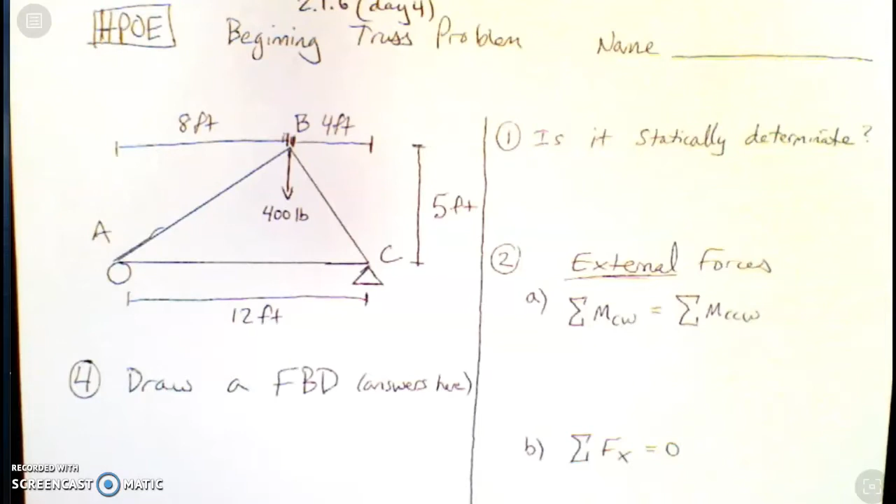Even though it's an easier picture, imagine a 400-pound weight hanging on this part of a bridge. The most simple bridge you can have is just a triangle. So I know you can do this, and this is the whole wrench thing that you got to get good at. Just know when I write this, it's the same as writing the forces right equal the forces left. You can change them over. I kind of prefer this way.

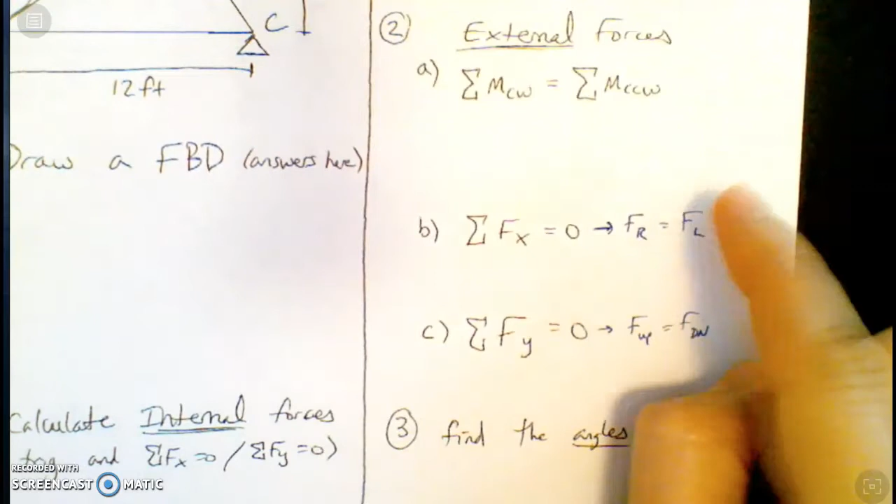It's just saying the sum of all x forces is 0, which means they cancel out. Same with this one. When you see the force of the y's is 0 total, it's just saying the force up equals the force down. And then you make that work. So this is old stuff. Finding the angles, remember, it's the inverse tangent of y over x. Okay, so you're going to do that for angle A, and you're going to do it for angle C. Remember, you don't need angle B. You never need that top angle. You only need any angles on the bottom.

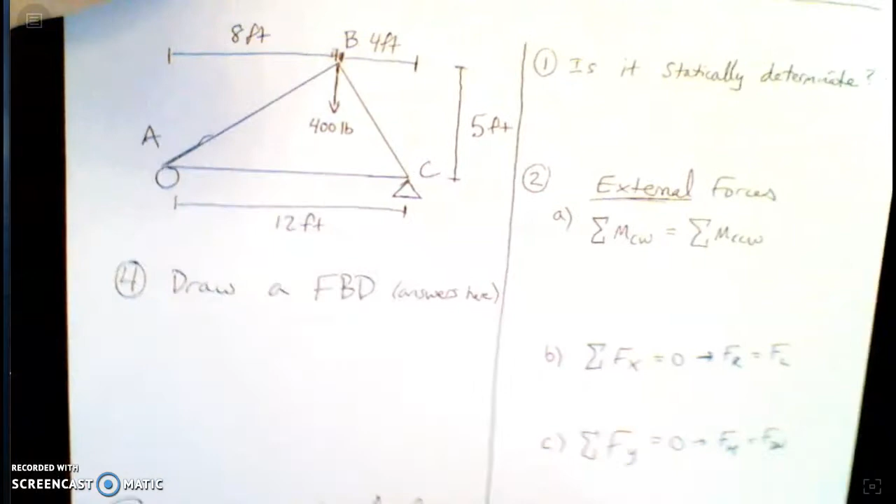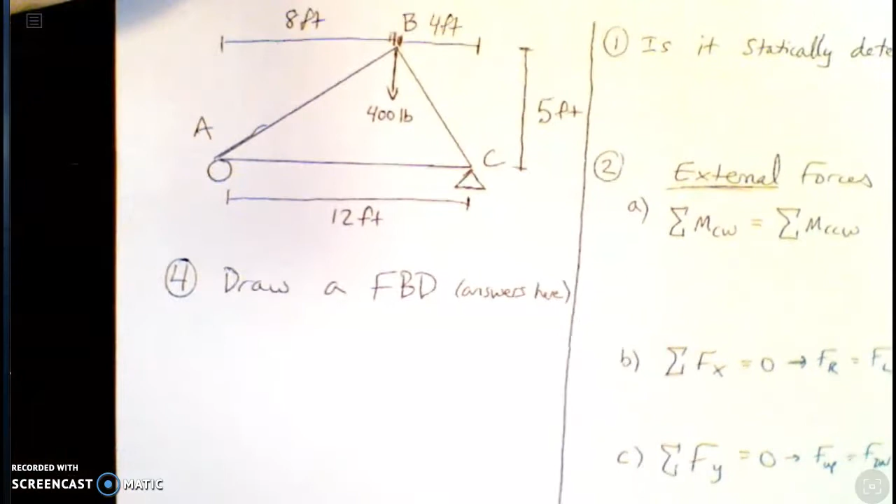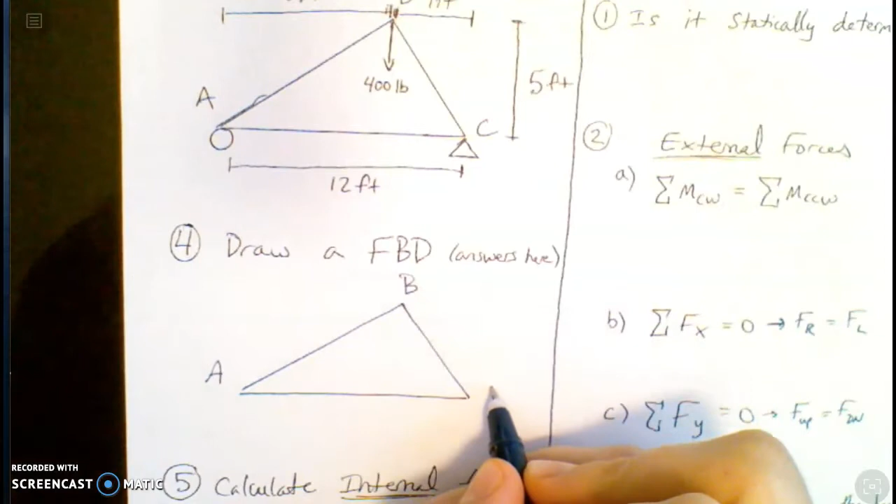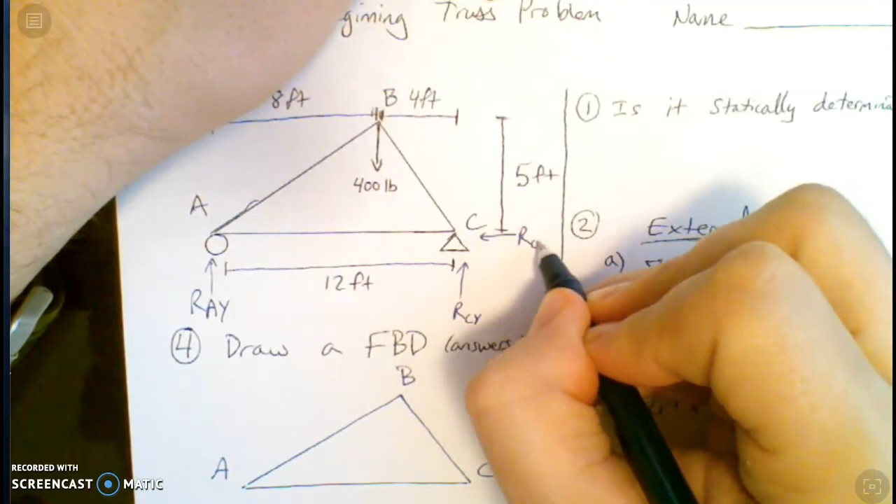So that was step 3. Step 4 is the free body diagram, and this is where all your answers will be. I am going to help set that up. So remember, with a pencil, or like me, an erasable pen, you want to redraw your original picture with joint A, joint B, and joint C. Okay, and instead of drawing the roller, which has RAY, and joint C has an up force, which is RCY, and it has an in force, which will probably be 0 because I don't see any horizontal forces.

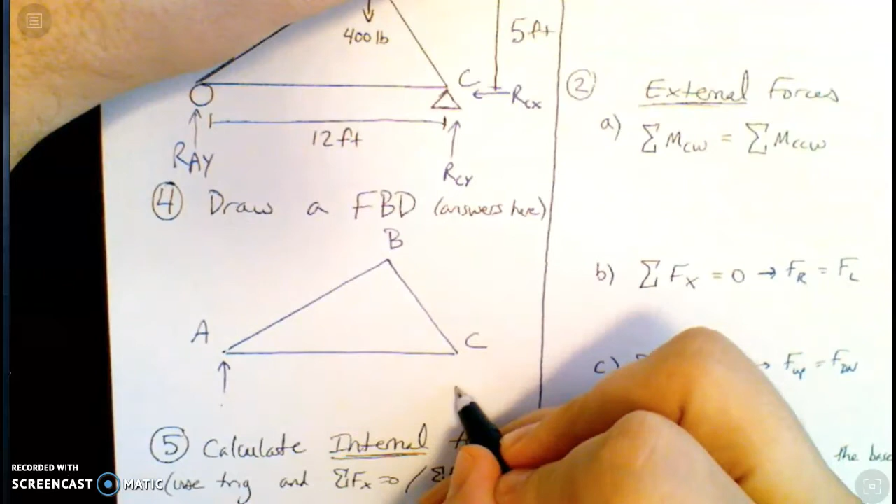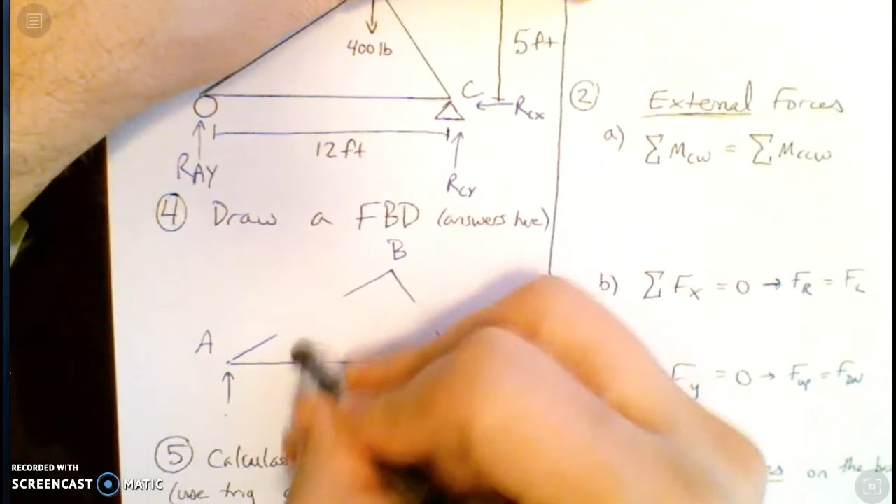So you basically just want to draw all the things you know, and you're gonna know those 3 answers once you're done with it. So I got this up force here that I'll know a number for. I got an up force here, and not to spoil the surprise, if this is 0, which it will be, you don't have to draw that on there. And then this is how you do free body diagrams. Since we've only had one example of that, you basically draw the whole triangle and just erase the middles so you can focus on each joint by itself. So there's joint A, there's joint B, and there's joint C.

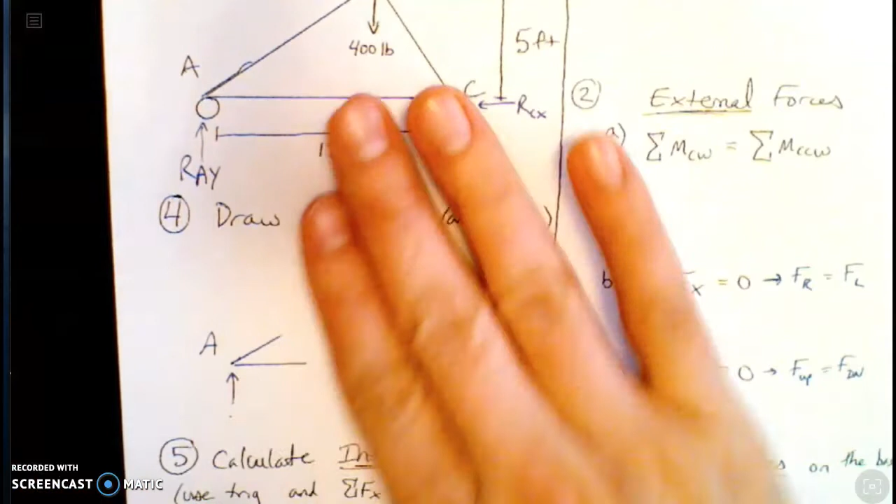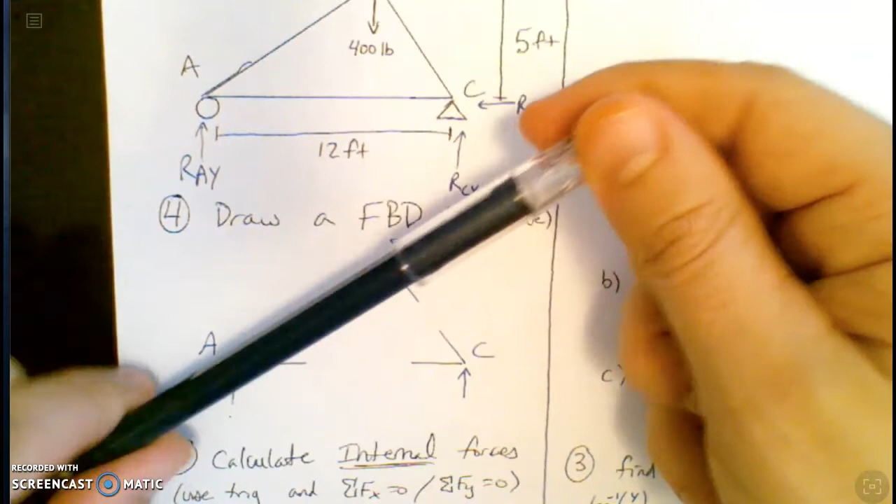So if I looked at joint A, here's how you know what forces are actually on these beams. If there's an outside force pushing up, remember I'm blocking these out, the only thing that can battle that force is a down force, and this guy can't create a down force, so it must be this diagonal pushing down that way. And every force, Newton's law, has an equal and opposite reaction. So if AB beam is pulling down this way, the only thing stopping it from moving is there must be an opposite force going that way.

Okay, now we're still focused on A. Now I have a diagonal down and left. The down part fights this up, but now it's pushing left. So the only thing that can combat that is if this horizontal piece battles and fights to the right. And now you got the whole Newton's law. Every force has an equal and opposite reaction force. So this pushing in, it's in compression, so there must be a force pushing back.

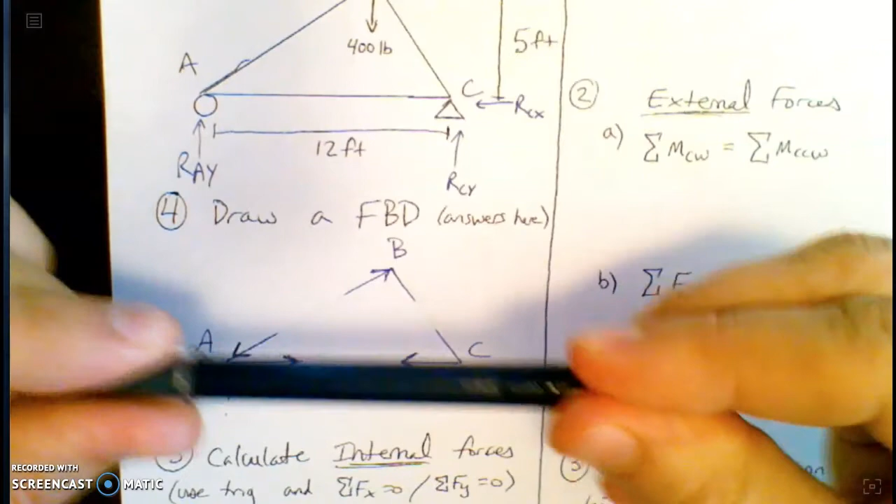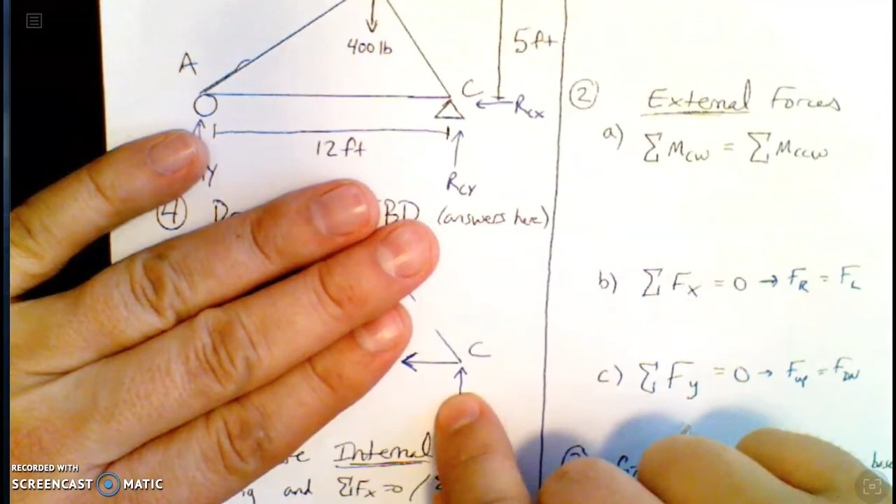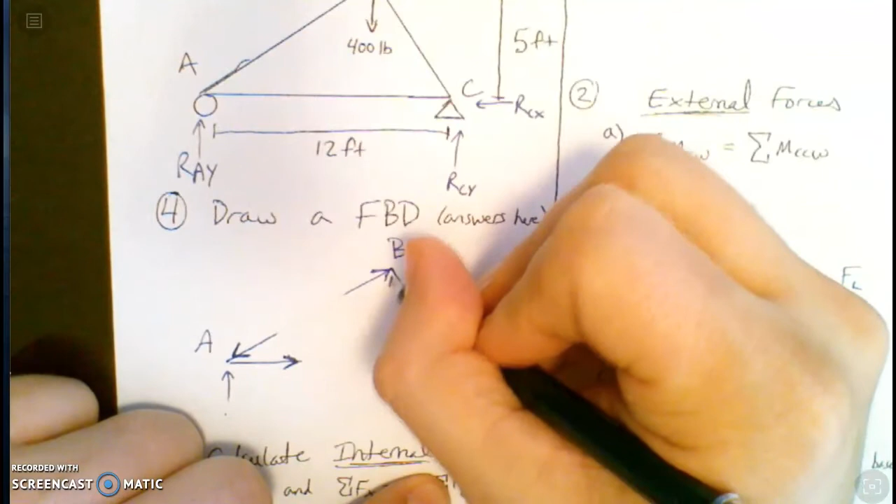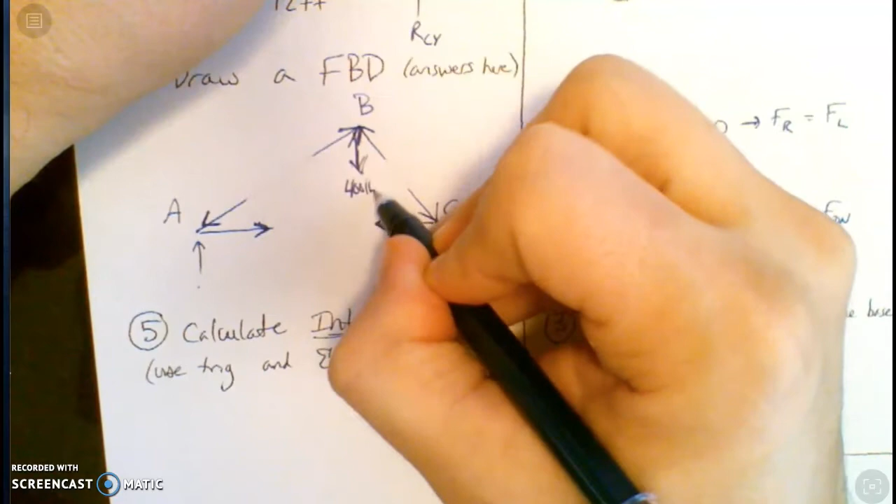And I got my last one. You can do it a variety of ways. You could do this again, just like joint A. If there's an up, there must be a down somewhere. Or you could say up here, I have an up, so there must be a down somewhere. Anyway, we'll get that going. So here, that's got to be a down. Oh wait, this is an up. Oh, I forgot. That's why. There's a 400-pound force I didn't even draw. I'm like, how can they both be going up? Well, that's because there's a 400-pound force going down. So those two ups will battle the one down. And you got some going right, some going left.

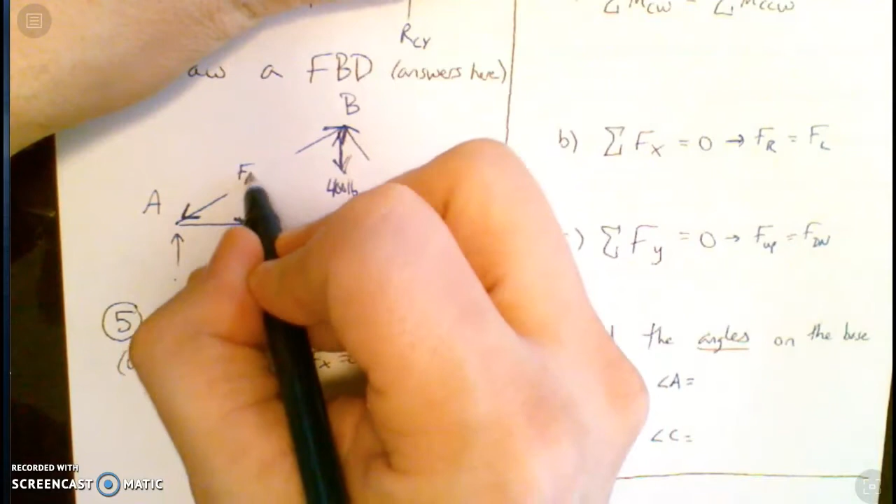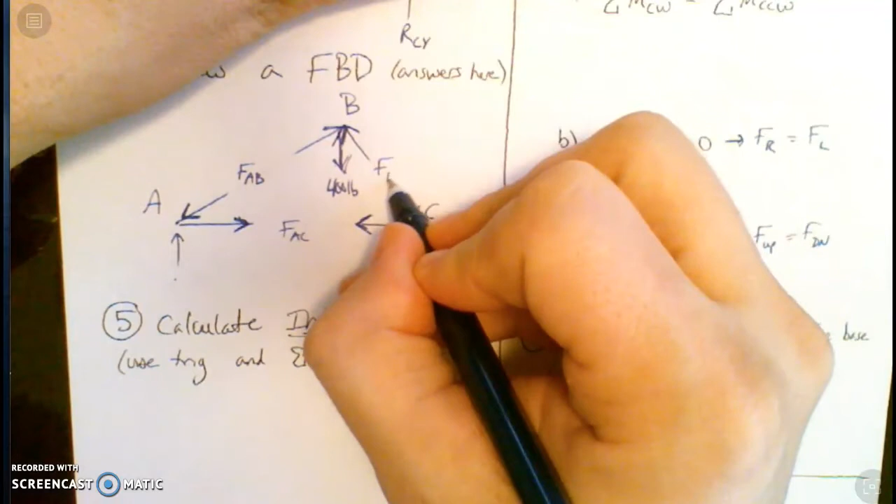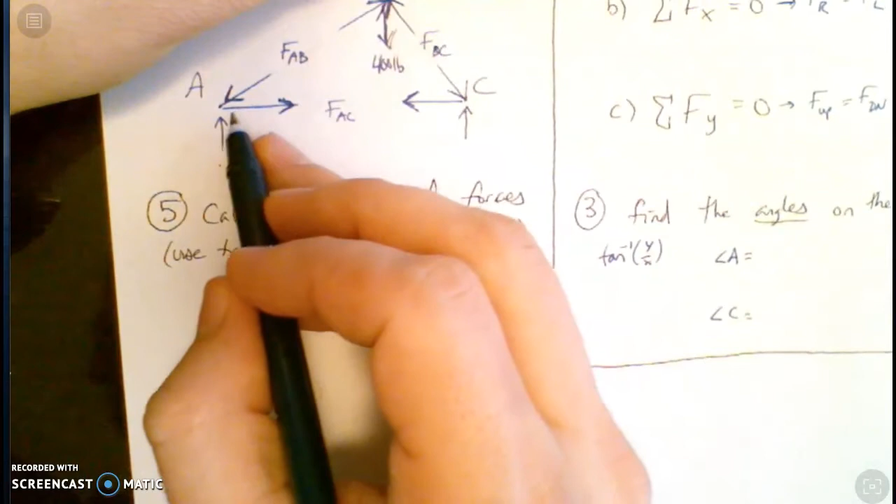All right, so you know you'll be done when you find FAB, the force on beam AB, the force on beam AC, and the force on BC. All right, so I wanted to get that drawn for you. Go back to the other problems and attack one joint at a time. You can go joint A, joint C. I would avoid joint B. There's too many unknowns. But you can only do these problems once you figure out those numbers there. And the angles. We need the angles in. But that's the work you're doing over here, the prep work.

Okay? And remember, when I see the sum of the x's equals 0, I've been saying force left equals force right. And the sum of the y's is when I say force ups must equal the force downs. Alright, so that's your setup, and you should be able to do it after that. Look back at that video on the more difficult one. This will be your first one you kind of do on your own. I helped you with the picture just because I know the arrows are a little confusing at first, but it's kind of nice. I like it because it's like little puzzles.